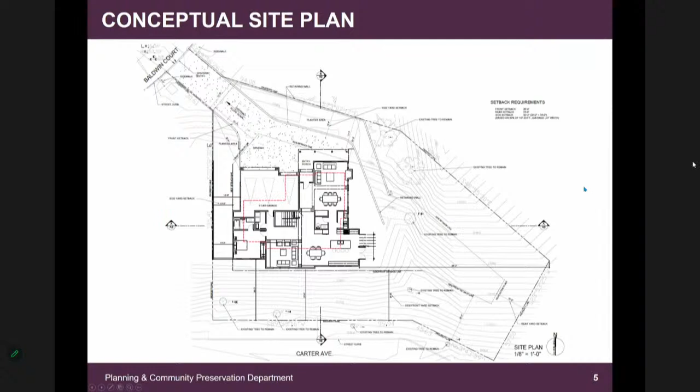On the left of the slide, you can see the original proposal. On the right is the revised proposal, with a shift of the second floor more towards the north. I've outlined here in red where that movement goes away from, and in green where that movement goes towards.

So the shift of the second floor kept the stairs in the same location, and due to this shift, it caused a reprogramming of the western bedroom so that the bathroom and bedroom space were swapped. In the primary bedroom, the walk-in closet was combined into one and mostly keeps the same programming.

That shift results in a distance from the ground floor wall plane of 9 to 10 feet, up from a 3 to 4 foot separation.

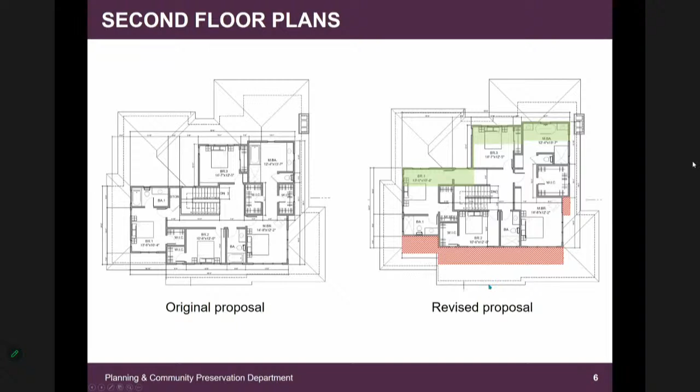And the roof plan here shows that same shift in massing. The second floor roof stays primarily the same, although it is slightly cleaned up.

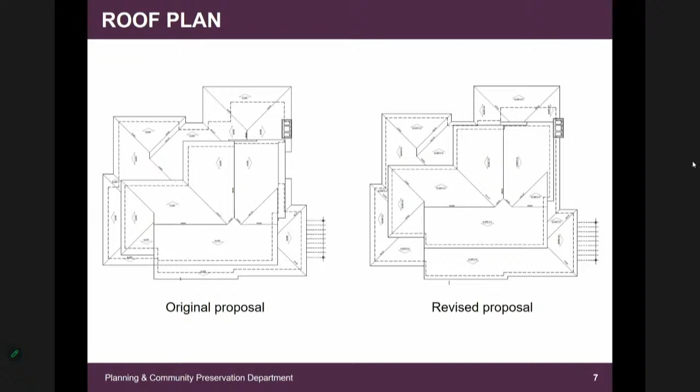Moving on to the south and north elevations, the change in massing was subtle here, but what's really noticeable is the area proportion of wall and roof. If you look at the original, there's a very small roof plane area on the south elevation and a larger roof plane area on the north elevation. The revised balances that out a bit more to keep in proportion. Additionally, the south elevation includes additional fenestration into the kitchen area by adding windows.

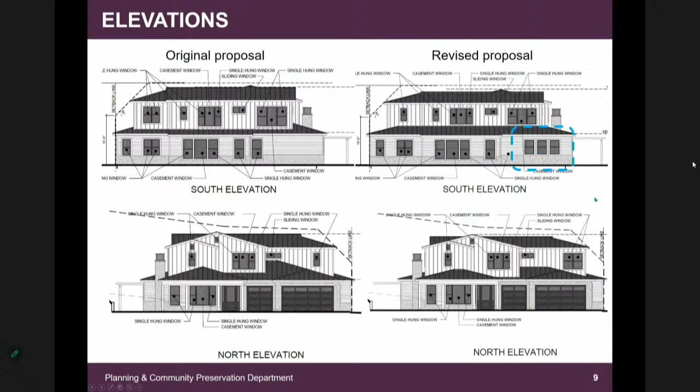Moving on to the massing study, on the left again is the original, and on the right is the revised proposal. You can see how this shift in massing is a better relation to the upslope from Carter Avenue.

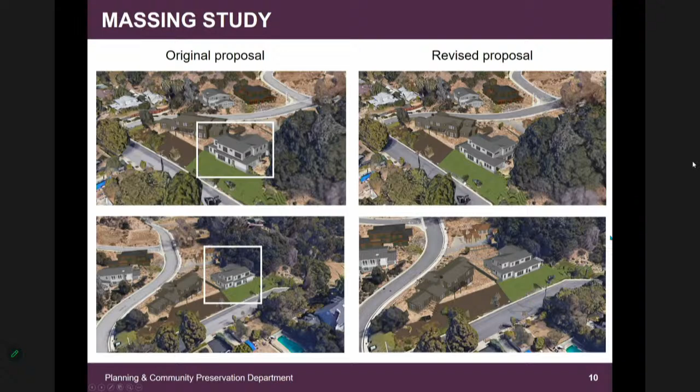Moving on to the renderings, on the top of the slide are renderings shown for demonstration purposes only, without landscaping. To the left is the original proposal with the massing more forward to Carter, and on the right is the revised proposal with the massing pushed back away from Carter.

On the bottom of the slide, the left shows the revised massing with existing landscaping, and the bottom right shows the revised massing with proposed landscaping, including those olive trees and London plane representations.

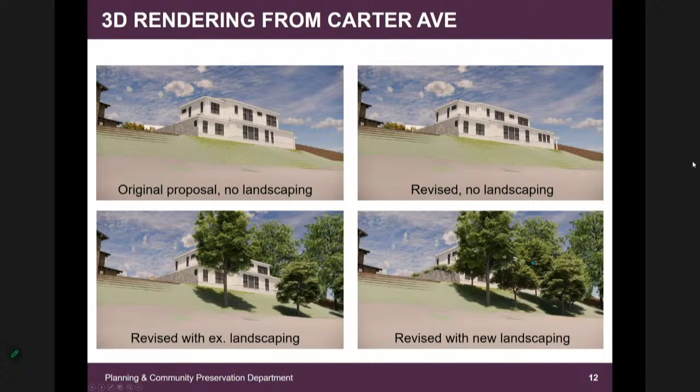Moving on to alternative views, you can see the building dead on with existing landscaping, and to the right the same view with proposed landscaping. Then moving slightly east along Carter, you can see the building, where most of its view is only of the kitchen area with the master bedroom suite above it.

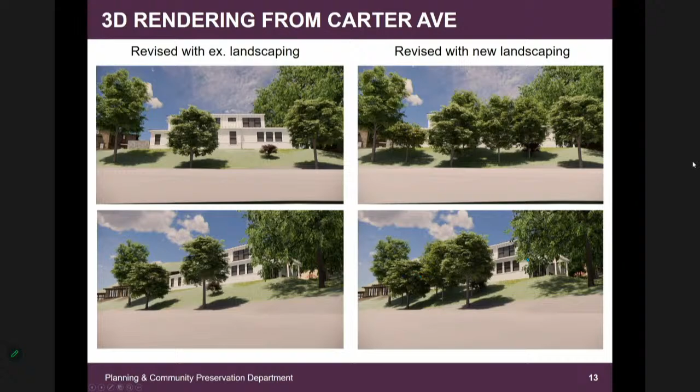Going back quickly, along the western edge fronting the side of the garage, there will be a line of bottle brush planted as well to further soften the building's appearance.

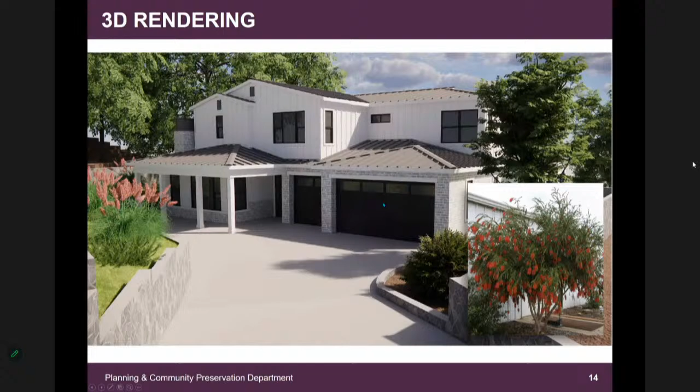The findings remain pretty much the same as originally proposed: it is consistent with the general plan for single-family residential use. It meets all zoning requirements, including height, setbacks, and parking. The new construction is on an existing building pad, and the project does not impact the ridgeline views.

The new house is differentiated from the existing historic structures as a contemporary farmhouse design, distinct from the Willis Estate and Carter Barn.

Baldwin Court does provide sufficient access for circulation of single-family development, and the development is consistent with single-family uses in the vicinity. The lot was created for the development of single-family residence, and the project meets all requirements of the zoning code, thereby meeting all findings for a conditional use permit.

Moving on to the Stonegate design guidelines, this is a custom architectural design that responds to the site conditions. Mass and bulk are reduced with breaks in wall plane, roof variation, architectural projections, and an open patio. The variety of window sizes and configurations enhance the visual interest. Materials are durable and low maintenance, using metal roof and wood siding, and the landscape plan is water efficient and an integral part of the project design.

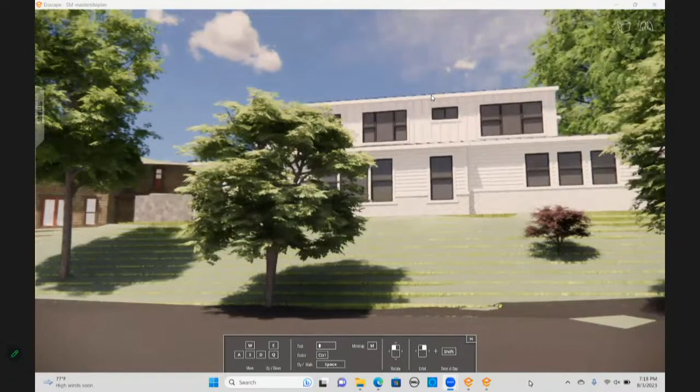I can fly around here to show you a different angle, which we didn't cover in the presentation. This was to address the concern we had last time on the building massing on the Carter side. I want to touch a little bit on the garage on the side here. Sorry, if you got motion sickness, let me know.

So from here, this is more like the pedestrian viewpoint of the house without too much landscaping in front of it - that's how much you will see from the sidewalk if you really want to look at the building. And like staff mentioned, the location of the garage doesn't have many choices because of the site condition, the shape of it, and also the position of the site is about almost 6 feet lower than the street.

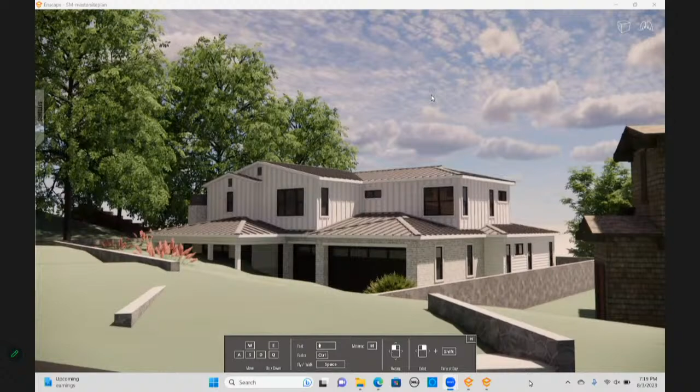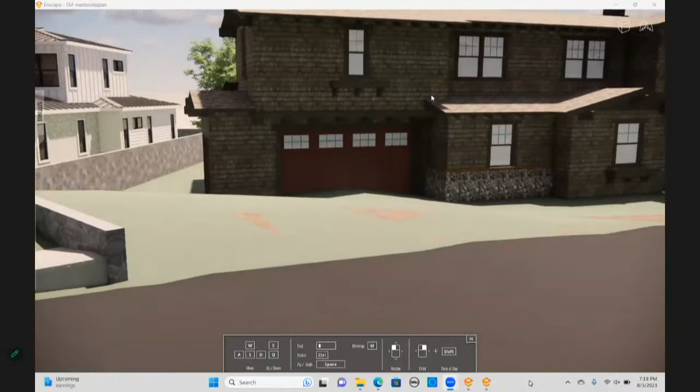So other than that, I think that pretty much addressed all the concerns we had last time. If you have any other questions let me know, or if you want to see a different view, let me know - I can fly around and point out whichever view you're concerned about.

Thank you. Any questions for the applicant?

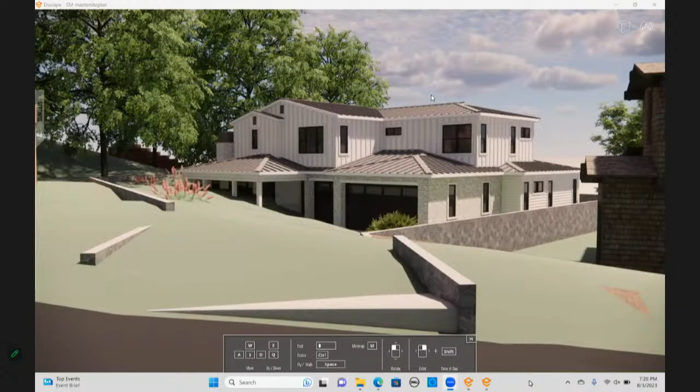The color palette on the house? Yeah, we discussed that about the color to make it more earth tone. But when we look at all the buildings that we have so far, let me point out a little bit.

We have a lot of earth tone color in this neighborhood. This building is kind of sitting to the corner of this whole lot, and the owner and I believe that we do need to let this building stand out a little bit, just because I'm sure the owner who lives there wants to be a little bit recognizable, after all these landscape and trees cover it.

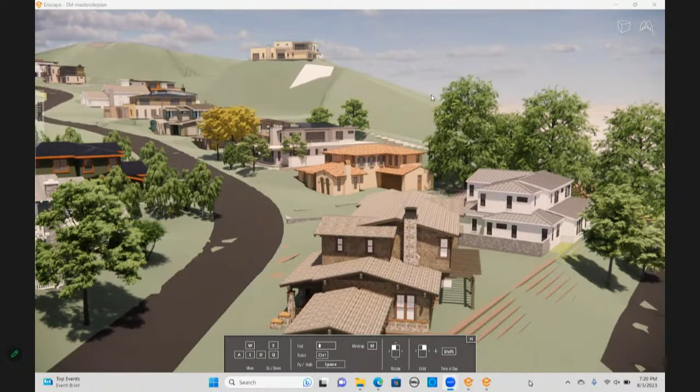A little bit brighter color, like white, or not really purely white, it's a little bit gray, light, that would say beige white color. It's just unfortunate on this machine here, it gives a little bit too much reflection on color, so the white becomes too white and the orange becomes too orange. Sorry about that. So other than that, this is not as white.

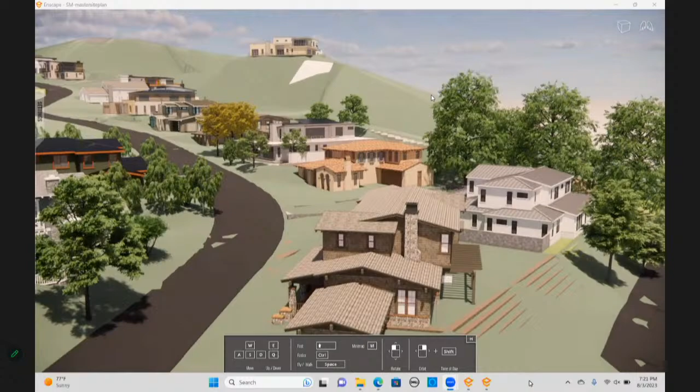We can bring out the actual color palette next time to show the commissioner the actual color that we pick. It's a little bit off-white on this one. So we believe that this lighter color will bring this building out a little bit from the neighborhood. Otherwise this house would kind of blend into the other neighbors and just disappear, and that'd be a little bit sad for the resident who's going to live there. That's the only reason that we didn't change the color.

Okay, yeah, that doesn't give me heartburn, that's fine. Hopefully the roof color is a little bit darker, so that gives some differentiation in the background. Sure, thank you, thank you.

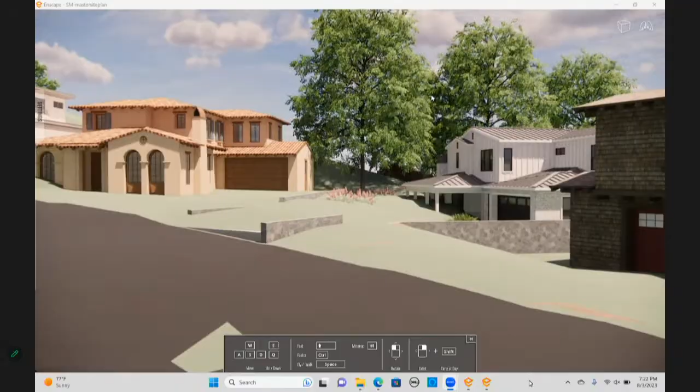All right, at this time we'll take public comment from anybody who would like to speak to this specific agendized item. Hearing none, we will bring it back to the commission.

I get to go first? Sure.

I think overall they met the requirements that we asked for. It's sort of a farmhouse style, so we can't ask for color palettes of rock and things like that. So I think it fits the style of the architecture. They moved the house back as much as they could. I was looking at the settlement agreement, and I don't want to delve too much into the legal, but it goes back to 2005. And I noticed it talks about Maranatha's settlement primarily for the building pads. The only reason I bring that up is that we're sort of stuck with these building pads.

And there were two lawsuits. There was the initial one that was won by Maranatha on religious grounds, and then the second one, I believe, with Dorn Platts, the secondary builder, but I guess what I'm getting at is I don't think anything changed from the original building pad agreements from 2005. Is that correct, Vince?

That's correct. Okay, right. So my evaluation is I think they've done as much as they possibly could with this. You may have some different opinion about shifting the garage like we were talking about, but I think since we're stuck with these building pads, it's hard to be hypercritical and make them jump through hoops for things that really just aren't even in the design standards. And they made the accommodation that we requested, so I can make the findings.

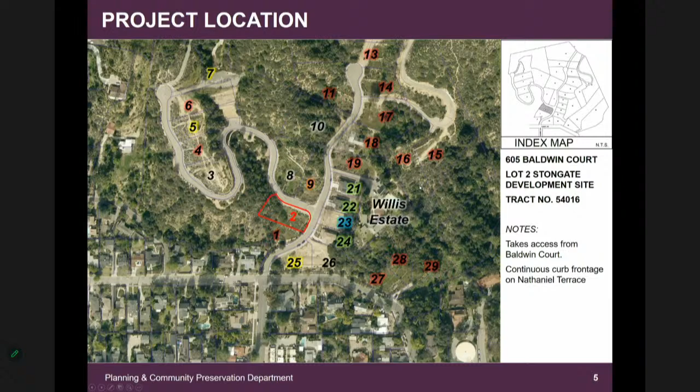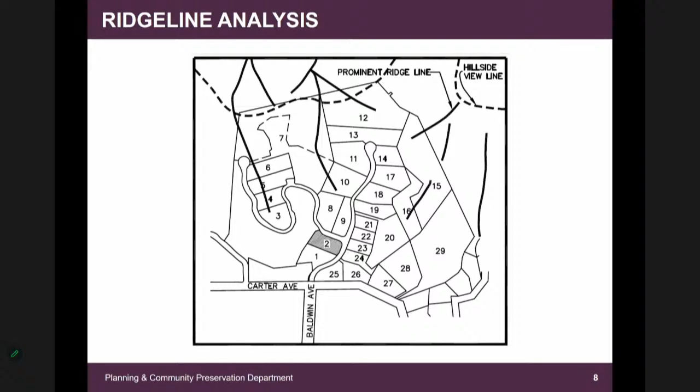Regarding the ridge lines, the nearest ridge line is located upon Lot 10 with a horizontal distance of approximately 253 feet and a vertical distance of approximately 66 feet, and that is a distance from the nearest property line. The pad elevation is approximately 89 feet below the ridge line.

Regarding the slope study, the existing site's building pad is primarily within category 1 of less than 15%. However, there are areas in and around the lot within slope categories 2, 3, and 4, with 4 being greater than 25%, which will require grade cuts creating retaining walls and berms. Highlighted areas on screen represent the approximate areas of excavation by slope category to achieve a full building pad elevation of 1,091 feet.

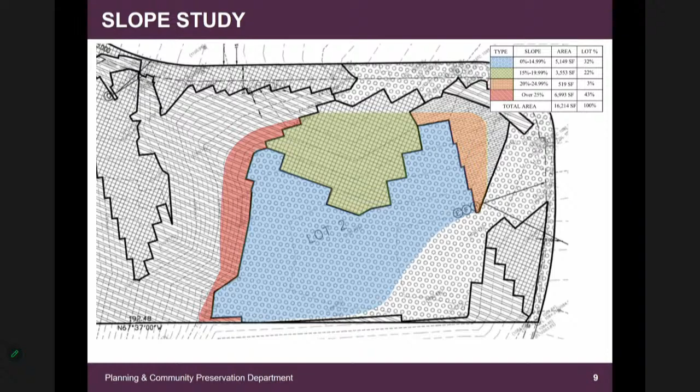Moving on to conceptual grading. Grading requires approximately 1,000 cubic yards of cut with 100 cubic yards of fill, leaving 900 cubic yards to export. A series of retaining walls is proposed at the center of the lot that will wrap the building footprint at the north and west sides. No retaining wall will have an exposed height greater than 6 feet.

Pad elevation is at the 1,091 foot elevation, which is 6 feet higher than the lot proposed at Lot 1, 13 feet lower than the average street elevation of Nathaniel Terrace, and 2.5 feet higher than the average street elevation at Baldwin Court.

There are 2 protected coast live oaks situated on the high hillside portion of the lot, which have no conflict with the proposed project and can be protected in place through the construction of this project.

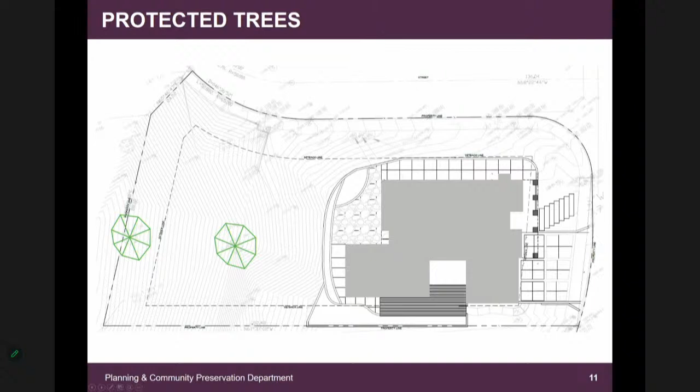In the conceptual site plan, there is a 2-bay garage opening stepped back from the porch approximately 7 feet 9 inches, with an additional 12-inch recess provided for the garage door.

Projections into the setback areas include a front porch not more than 6 feet, a fireplace at the north end, and decking along the south end. That decking and projection into the side yard setback does provide access through and around the building.

The side yard setbacks shown on screen are calculated on the basis of an average lot width, where the southern side yard setback equals 10% of the average lot width, equal to 8 feet 2 inches, with the remaining 16 feet 5 inches for the north end as required.

However, as provided, you get a north side yard setback of 25 feet 11 inches. Provided on the south side is 9 feet 4 inches. Front yard setback is established at 25 feet, and the rear yard setback is 95 feet 5 inches, mostly due to the hillside slope.

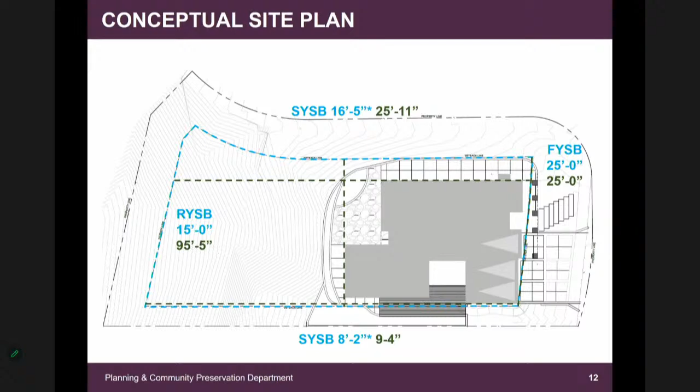Moving on to the conceptual landscape plan. Landscaped areas take advantage of the remaining natural land area between the residence and Nathaniel Terrace, as well as moving on to Baldwin Court, to create a vegetated privacy screen consisting of shoestring acacia, strawberry tree, palms, and aloe, each of which are part of the Stonegate Design Guidelines recommended plant palette.

The raised planting area screen along Nathaniel Terrace varies in elevation, tapering from 1 foot near the driveway to about 13 feet just where the current, proposed coast live oak is to be planted.

Hardscape materials include stone and concrete in varying shades of tan, as well as gray for walkways.

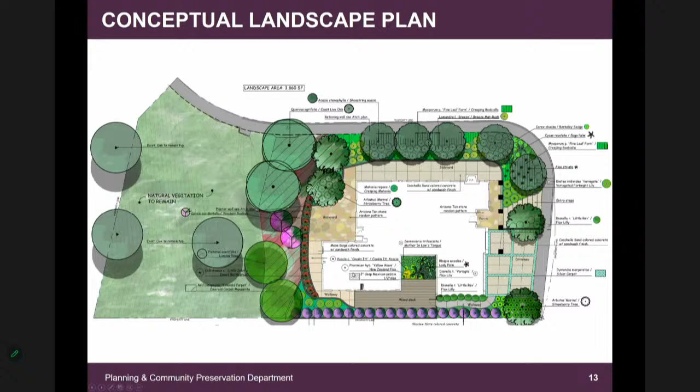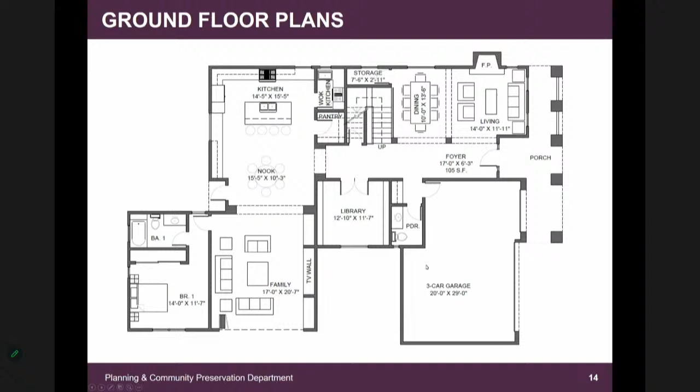At the second floor, the primary bedroom suite occupies the eastern half, and the western half is occupied by 2 ensuite bedrooms, a laundry room, a den, and the stairwell. The southwest bedroom includes an open south-facing balcony which will capture a view of the valley, being able to peer over the roof of the proposed Lot 1.

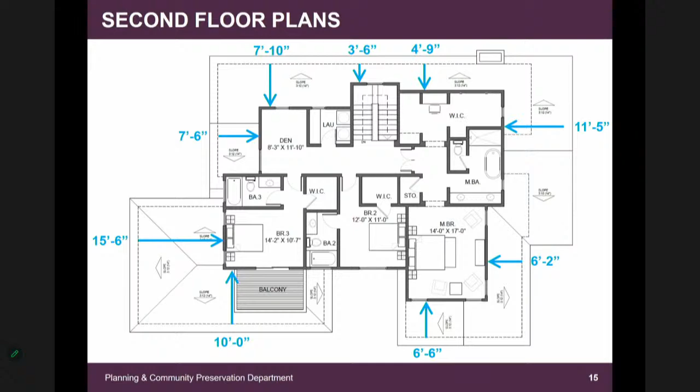The massing is stepped back from the first floor building line on each side. Because strategic landscaping creates a vegetated screen at the north side, more stepping back has been provided for the west and south side in thought of privacy for proposed Lot 1 and other neighbors to the south. The total area of the second floor is 1,605 square feet.

The roof is designed to represent traditional craftsman style by incorporating a combination of gable and hipped roofs in one consistent low pitch with modest eaves to allow for exposed rafters and beams. Gables are primarily faced east and west to allow for larger roof plane sheds to follow the natural hillside slopes. Hips are used more frequently on the second floor to maintain a low building profile.

The roof plan is slightly modified from the plan that you have in your agenda packet. Notably, what you have in your agenda packet shows a south-facing gable on the second floor and a hip here on the southwest portion. What's seen on screen is the intended design, and will be demonstrated through elevations and 3D models.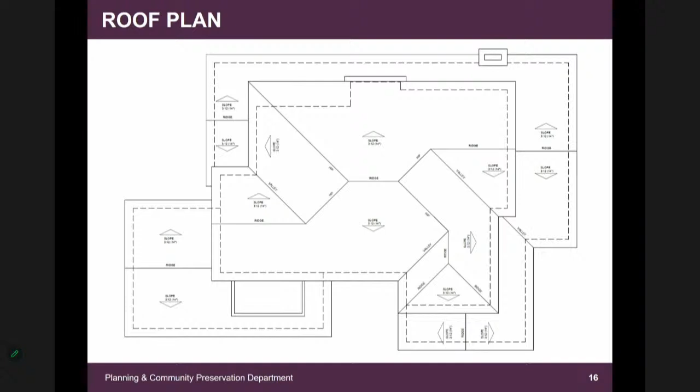The sections here better demonstrate the natural slope and the structure's relationship to it. At the top of the slide, you see the west half cut away looking east at the building, with north at the left and south at the right. At the bottom of the slide, you see the north half of the building with the south half cut away; west is on the left and east is on the right.

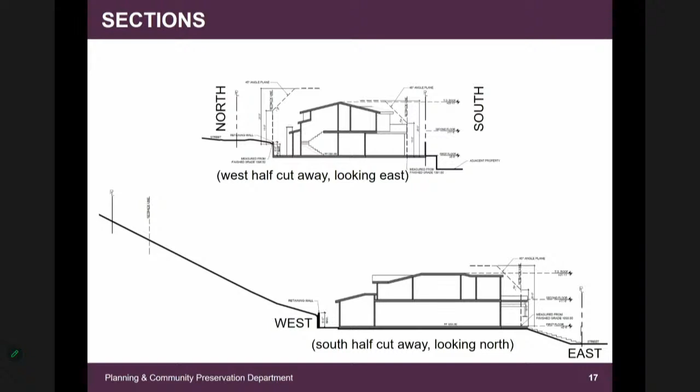I would recommend that you take a look at the TV screens for a better view of the colors represented. The north and south elevations are well fenestrated, providing single hung windows in pairs and standing alone, with divided light detail in the top half.

Roofs are primarily shed toward the north and south sides, again with braces and beams seen exposed beyond the side projecting eaves. The chimney is present at the north elevation and provides some visual interest to break continuous wall planes.

At the north elevation, some massing in the second floor slightly projects where the stairwell is located. At the center of the south elevation, the massing is recessed through the first and second floor to create a private garden space. The balcony of the second floor is present at the south elevation, directly above the family room's expansive opening.

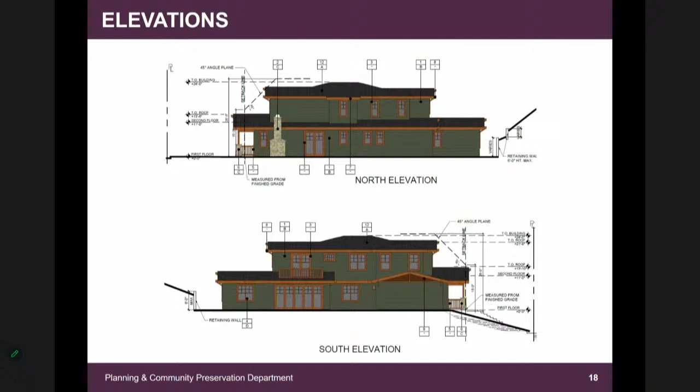The east and west elevations continue the pattern of fenestration with similar use of standalone and paired single-hung windows with divided light detail in the top half. Gable ends are more present on these elevations, highlighting the craftsman style by revealing the secondary material below the gables and presenting braces and exposed beams. The front porch is covered by a projected gable supported on double square posts and piers.

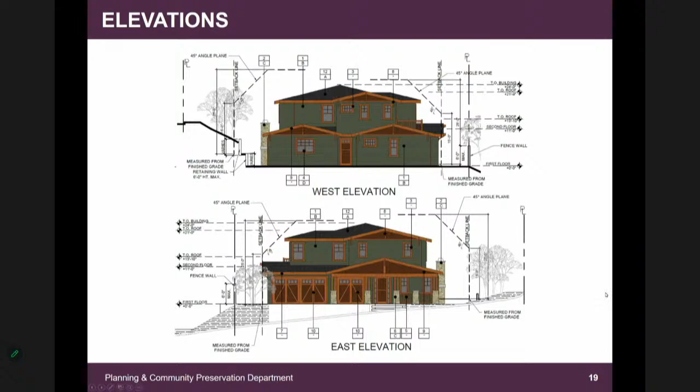The front and back elevations present the materials here. There is a standing seam metal roof in a charcoal color. For wood trim around the building, you get this sand-like color—it's not well represented here on screen or on the TV. For the siding, there is a green color, a dark forest green; I believe it's called chiseled green. And for stonework, you get this mold brick work.

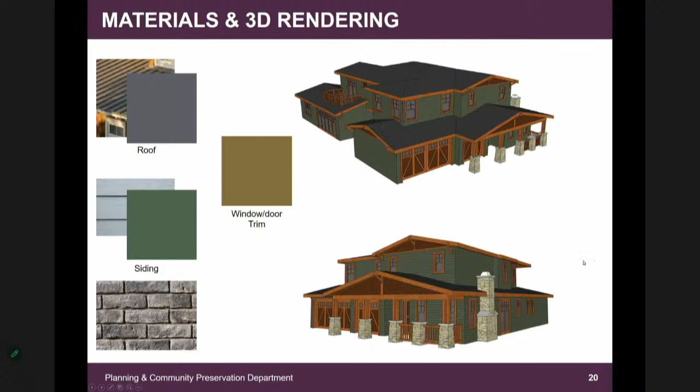And here's the project data. As you can see, all aspects of this building are compliant with the zoning code and the settlement agreement.

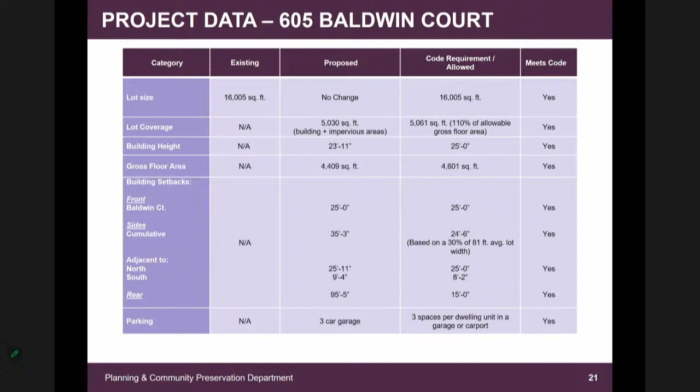There was a neighborhood analysis sampling 9 properties within a 300-foot radius of the property. The residential floor area proposed is 3,813 square feet, which is 106 square feet below the average of the top third of residences in the area.

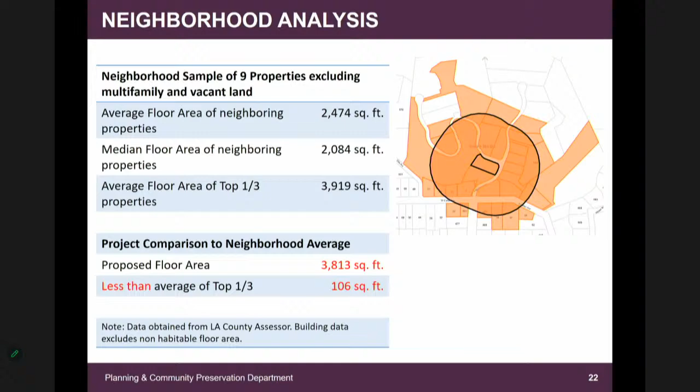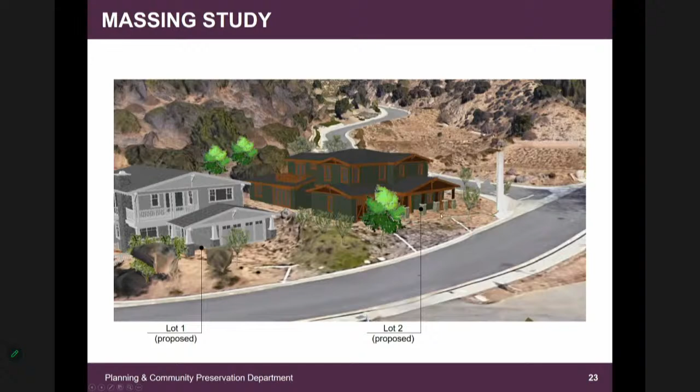For the hillside development permit, staff has found that it is consistent with the general plan for single-family residential use. It meets all zoning regulations, including height, setbacks, and parking. The new construction is on an existing flat building pad. The project does not impact ridgeline views. Development will comply with the fuel modification plan. It uses an earth tone color palette.

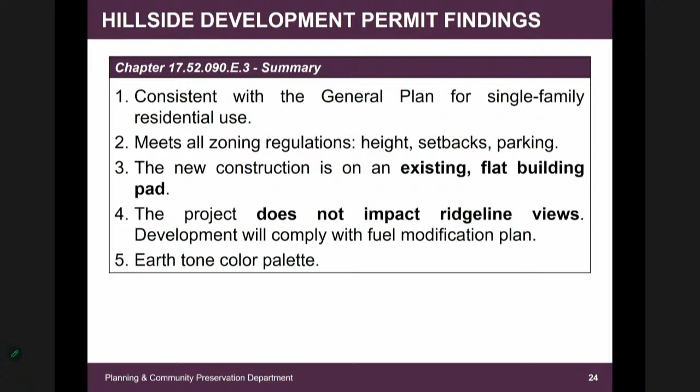For conditional use permit findings, the new house is differentiated from the existing historic structure using a contemporary craftsman style. Baldwin Court provides sufficient access and circulation for the single-family development. The single-family use is consistent with single-family development in its vicinity, and the lot was created for the development. The project meets all requirements of the zoning code.

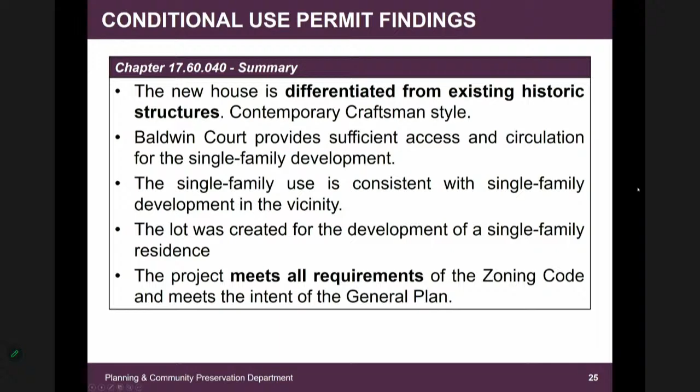The project is also consistent with the Stonegate design guidelines in that it is a custom architectural design that responds to the site conditions. The mass and bulk are reduced with breaks in wall plane, roof variation, architectural projections, and an open patio. A variety of window sizes and configurations are included to enhance visual interest. The materials are durable and low maintenance, using metal roof and fiber cement board siding. Its landscape plan is water efficient and an integral part of the project design.

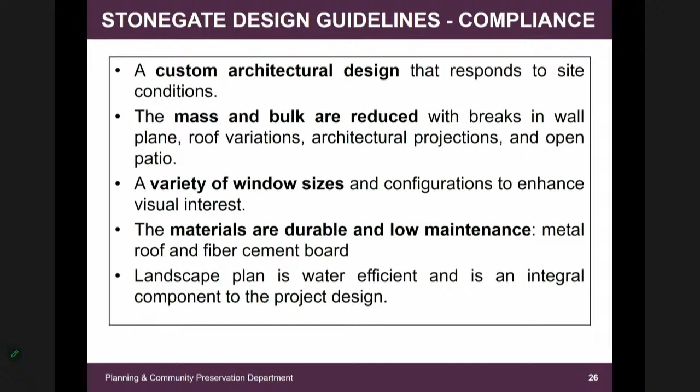Tonight, the Planning Commission may approve the hillside development permit and conditional use permit subject to the conditions of approval as shown in Planning Resolution 23-12. They may approve the applications with modifications, deny the request by identifying the findings that cannot be made and the basis for rejecting those findings, or continue the subject project and provide direction to staff and the applicant.

Staff is recommending approval of these applications for Hillside Development Permit 1503 and Conditional Use Permit 1503, subject to conditions of approval in Planning Commission Resolution 23-12.

That concludes my presentation, and I believe the applicant has additional presentation. You can take questions first. Sure, questions for staff? Yeah, I do.

I have one just quick question, more for my sanity. The street north of this lot, is it Nathaniel Court or Edgeview? Because I see it both ways. Yes, it's currently Nathaniel Terrace. At one point it was Edgeview Drive. Okay, I just wanted to make sure, because there wasn't another street I was looking for.

My other question is, I've seen a bunch of pictures of the house, and I think the trim color looks different in every picture. There was another color in your color palette that looked even different than that. So is the trim a stained wood, or is that a paint? I see a lot of what looks like wood in the pictures, but I want to make sure that's not paint, and what color it is. That color is not well represented on screen or in print. It is identified in the materials, but I would defer to the applicant to clarify that.

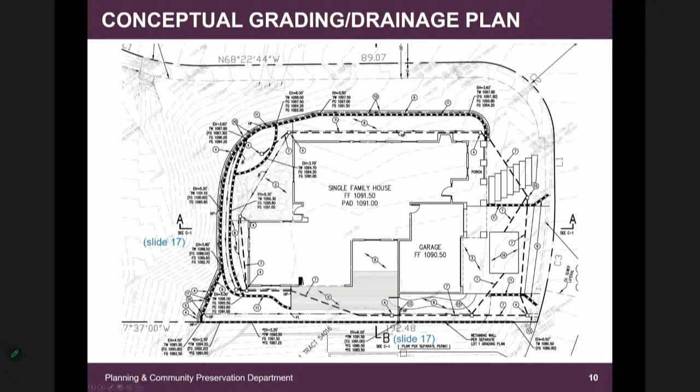Okay, so it is not flat, it contours with the natural contour of the land? It'll contour with the natural land adjacent at its north. So the exposed height will step down at some points. Will it step down or contour down? I would have to defer to the applicant to clarify that, but I understand it would step down. Those are my questions. Did you want me to clarify on drainage there? Was that clear? No, that's fine. Okay, thank you.

Would the applicant like to present?

So I will use the same model I presented earlier. That model has every building there, so if you want to see more, I can show you.

To answer the question the Commissioner had on the trim color, those are stain colors, but there's a little bit of orange hint in there to enhance the wood grains and everything a little bit better. That's why it looks a little bit orange-ish on the screen. The color is a little bit too much on the screen, but the actual color is a little bit darker than that.

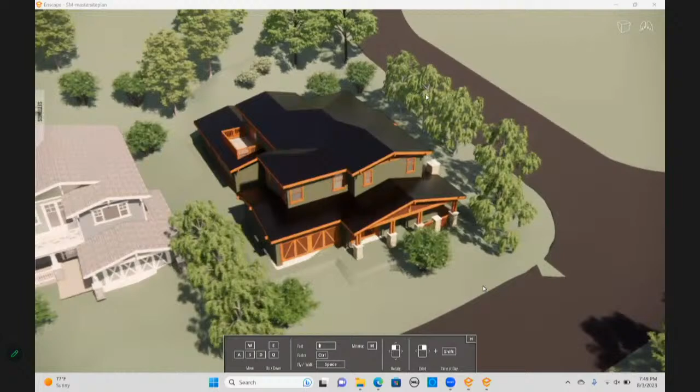To answer the retaining wall question, it's not contoured down through the slope, but it's stepping. We can make it step every 4 feet or 3 feet, one course or something, to follow the contour, because the street on the north side is much higher, sloping down, so we can work with that.

If the stepping would be bothersome to see, right now we are using a CMU block wall for the retaining wall, but if we want a natural looking sloping down, we could do cast-in-place concrete to do that too. It's more troublesome, but it's doable. If that becomes a major issue that would better fit the natural sloping, we can change to that too. So that's doable - just wanted to give a little quick presentation here.

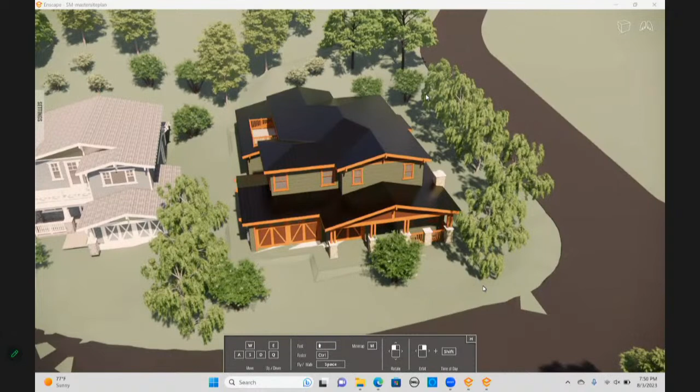Again, we're going to fly through this building. I think the biggest challenge here is still the garage location, or the garage door location facing. The challenge here is the site is on an angled sloping side, so the best location for the car entry is at the east-south corner of the lot, and that's pretty much given where the driveway entry is and where the garage direction is.

Unfortunately, if we try to push the garage to the back of the building, that gives a very, very long driveway condition, which kind of defeats the purpose of trying to make every building more sustainable, reduce the hardscaping, and provide more landscaping or permeable space - it just doesn't really work that well between the two.

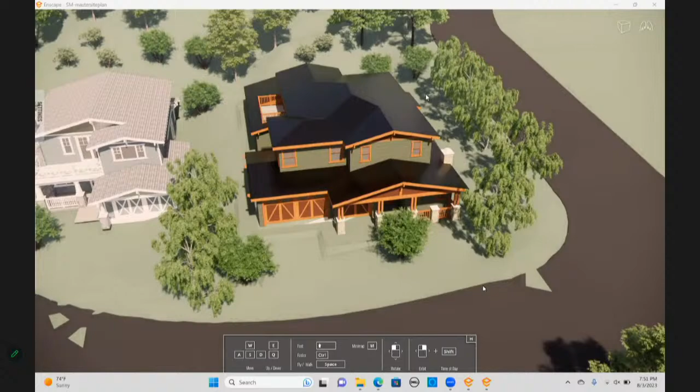So we have to take what it is and keep the garage more where it is now. To make this garage door less obvious, we are trying to enhance this porch, craftsman porch design, to be bigger, and that serves a true function of the design - one is to make the first floor look much bigger proportionally, to make the second floor appear further away and smaller, and also to cover one of the garage doors to hide it behind.

On the two-car garage door, we made the overhang much longer - I believe it's 2 feet or 30 inches - to enhance the depth for the garage door, and we also picked the most craftsman decorative style for this. Hopefully that addresses the concern: if you cannot make the garage disappear or hide it in the back, at least make it more decorative. So we've been taking that route for the architectural style with the garage door.

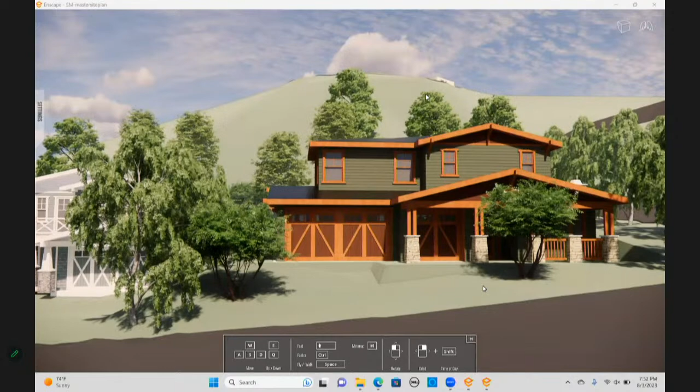For this design, since we're here, Lot 1 is even more challenging to get the garage door placed, because there's no other way to make the garage door and the driveway entry align at the same point - it's more like a triangle lot. We can review it later.

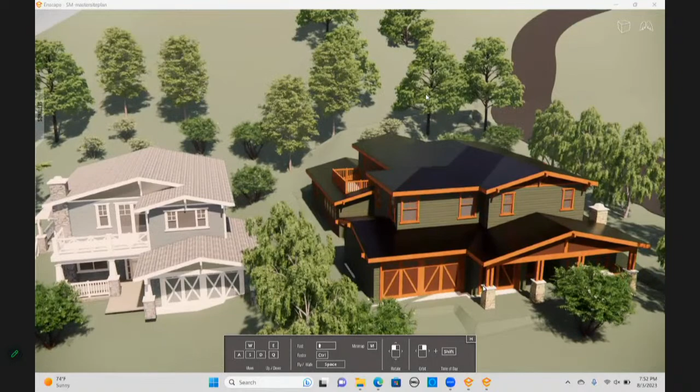But to provide more privacy and also address the viewing angle to the neighbor, we are setting back the second floor on the south side a little bit more. Let me change the sun angle here. Here we go.

So this one will give the neighbor more upper floor distance and spacing between the two buildings. Having that porch or big balcony facing the south will give this resident a bit more city view at night or at the daytime, looking over Lot 1, which is about 6 to 7 feet lower pad compared to Lot 2.

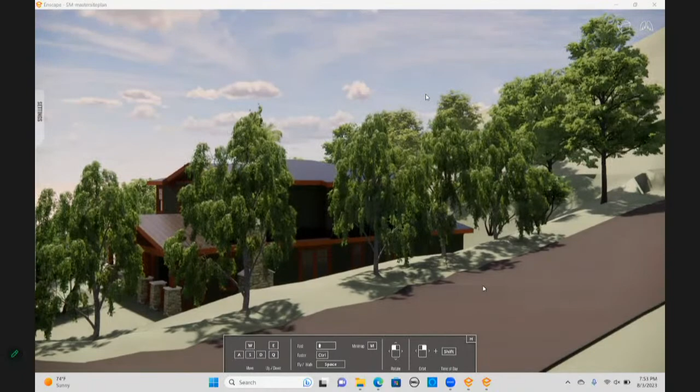On the north side, if you go down to the pedestrian view, you'll feel this building is more like a one-story building, because it's between 6 to 8 feet upper to almost 12 feet lower on the street side. So that gives a little bit different aspect on that one.

This is north facing, that's why it's really hard to catch a shadow right here. But we do have a lot of trees here to diffuse the traffic.

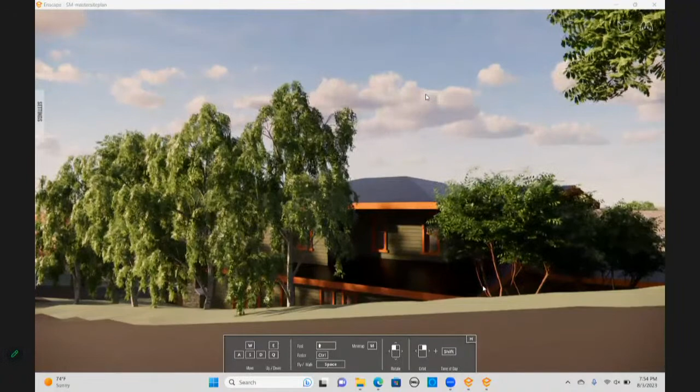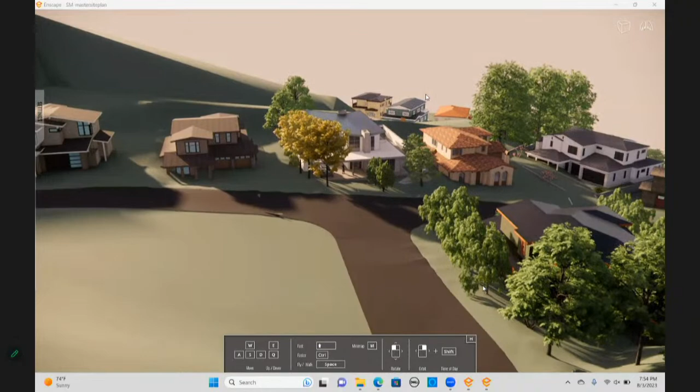This is a corner lot, and even though we don't have too many residents above, we have a few. So we try to give some privacy and noise control on the north side with more trees here. Later on, I believe there's one project north of this that's been approved already, so we can minimize the window-to-window looking over situation once that building has been built.

And the left-hand side will be that mid-century modern that we just recently got approved a couple weeks ago. That's how it looks like from this street angle here.

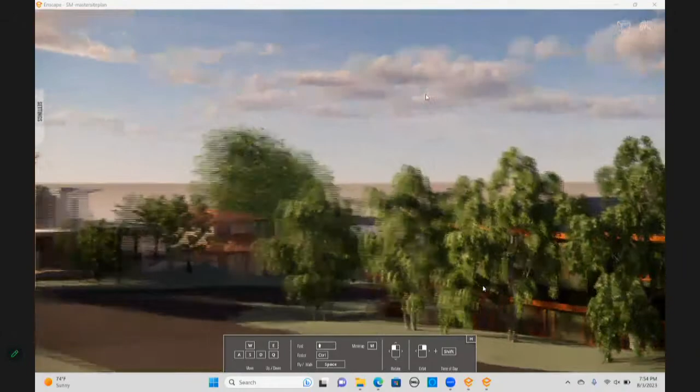So that's pretty much what we have. Sorry, keep flying through the trees. That's how it's going to look from the street side for the pedestrian looking over.

If you have any questions, please feel free to let me know. Great, thank you. Are there any questions for the applicant?

Would you have a 10-foot retaining wall to carve out the driveway, putting the garage in the back? Right now this garage is about 3-4 feet above the curb line, the curb cut, and that gives the best scenario to prevent water intrusion during the rains and everything else. We did try a version where this garage door is further set back, but that gives a very long driveway.

Number two, we still cannot turn the garage to the south facing side just because the site is not wide enough to create that 20 feet driveway with another 25 feet of backup space for a south-facing garage. Maybe putting the house in the back and the driveway all the way around to the back with the garage in the back - that's the challenge, the slope in the back, I understand that.

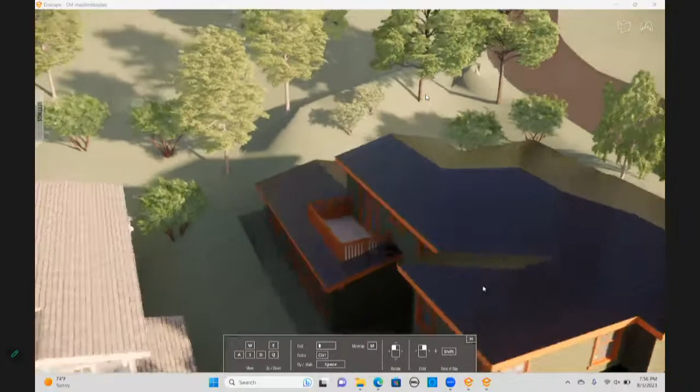On top of that, we don't want the resident facing that 6 feet high retaining wall in the back all the time. So we actually create a terraced retaining wall in 2 steps, like 3 feet and 3 feet, or 3 feet and 2.5 feet, to make a raised garden or raised planter garden to kind of diffuse the retaining wall condition. And again, the south side of the building has been pushed as far as we can.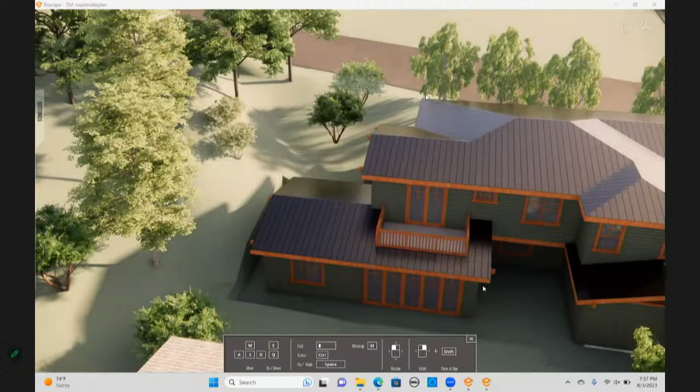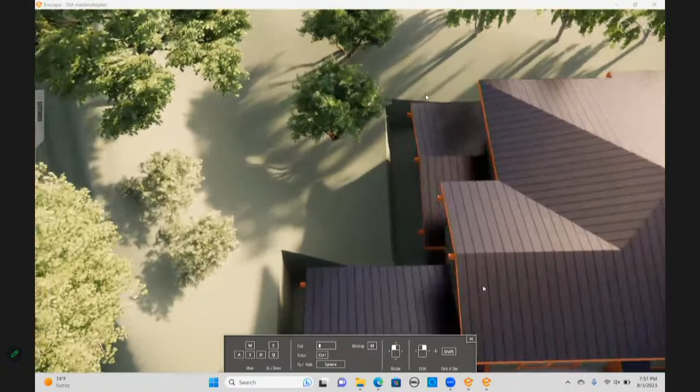That's been butting right up to the hill. We only have about 4 to 5 feet walkway there. But on the north side, that's why we try to create - this model doesn't really represent it well on that garden - but behind this we have a little quarter circle garden in the back to create a bit of private open space in the back.

This house doesn't have too much open space on their own lot. That's the other reason we didn't really push the garage back further from its current location. If we pushed it back another maybe 10-15 feet, we'd lose that little open space in the middle, which is one of the smaller open spaces this house has.

So after pushing that, this house would almost be like an apartment, not really having an outdoor space for private use. Yeah, okay, I mean it sort of looks - go ahead, that's fine, thank you. Thank you.

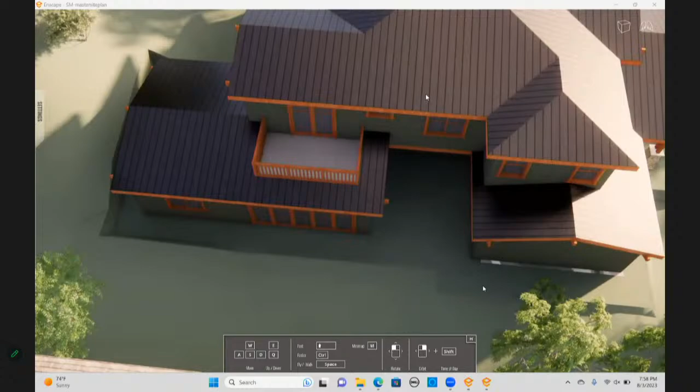Any other questions for the applicant? Not right now, no. All right, oh, I do have one question.

The front porch - what is that raised? I see the pillars and everything, but I'm having a hard time visualizing what that's going to look like. Sure, let me pan over. I'll try to open another standalone model to show better.

Oops, sorry, let me bring back this. Oh, sorry, bear with me for a second. It's a heavy file.

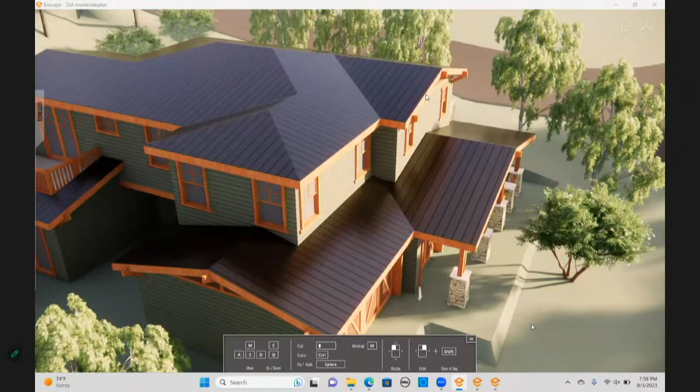The porch has been elevated, depending on which angle you're viewing it, because the north side is a little higher, so we tried to even the north side of the corner. On the north side it's flat with the side, but once you're walking to the south, the left side of the building, the porch seems higher. That's why we have that walkway, kind of elevated out, with 2-3 steps walking up to the porch.

So is that a concrete pad, the porch then? It's not just that - it's a concrete pad for the porch, and then there's a stone paver walkway leading up to the concrete pad.

Because that other door is a garage, right? Yes, that was intentionally hidden by the porch cover. That's how we can minimize the look of the 3-car garage to make it look more like a 2-car garage. That's why I was having a tough time figuring out what was the driveway and what was the porch. Let me see how I can show that better.

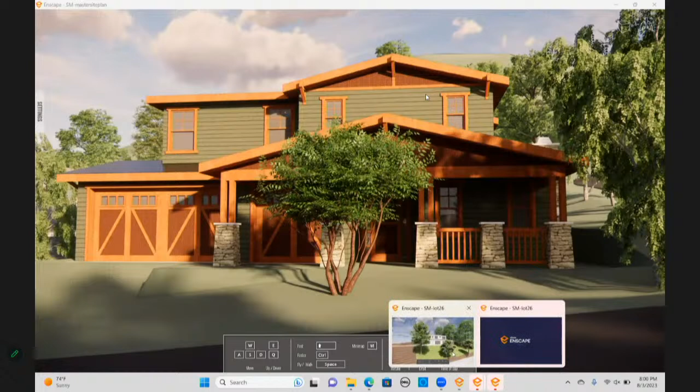My last question would be, is this a standing seam metal roof? Yes, this is stainless steel metal roof. The reason we chose that instead of other materials: number one, this is a higher fire hazard zone. Number two, we tried to give this a modern look for this craftsman house - a wood shingle or typical shingle doesn't really reflect this craftsman style. That's why we chose the standing seam metal roof for this project.

But as drawn on the plans, everything from the left side of the house as we're facing it, to the second pillar in, is concrete straight all the way out to the street, right?

I'm sorry, come again? There's a driveway directly behind that tree - the tree doesn't actually exist, by the way. Right, directly behind the tree, that pillar, everything to the end of the house is concrete all the way to the street. Correct, none of that green is actually green - it's actually concrete.

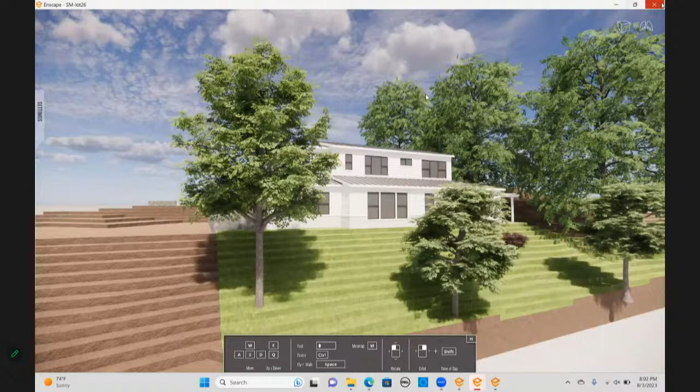Let me see if I can bring up another model that may better show the condition. Sorry, it's still loading - but you're right, the porch is concrete, and also the driveway. The driveway isn't really concrete though, it's a permeable paver. But the porch is concrete. Yes, okay.

Perfect. Any other questions for staff? I mean, for the applicant? No. All right, thank you.

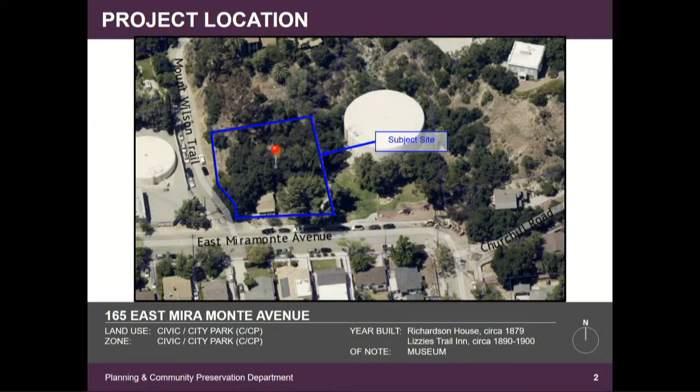The Richardson House was constructed. There's also 2 buildings on this site, one being the Richardson House, the other Lizzie's Trail Inn. I'm mentioning both, and we'll find out why as I continue with this presentation. But just wanted to point out that the Richardson House was constructed in 1879, Lizzie's Trail Inn between 1890 and 1900. Both structures are used as a museum.

I also wanted to point out that under Sierra Madre Municipal Code 17.04.090, applications to the city, we are exempt from actually going through this procedure, but staff felt it would be prudent to treat city property as we would treat residential property in the city. So we are taking this through for both the Planning Commission and City Council's consideration for designation.

In the Historic Resource Evaluation Report, both the buildings, both Richardson House as well as Lizzie's Trail Inn, are vernacular in design and are not architecturally significant.